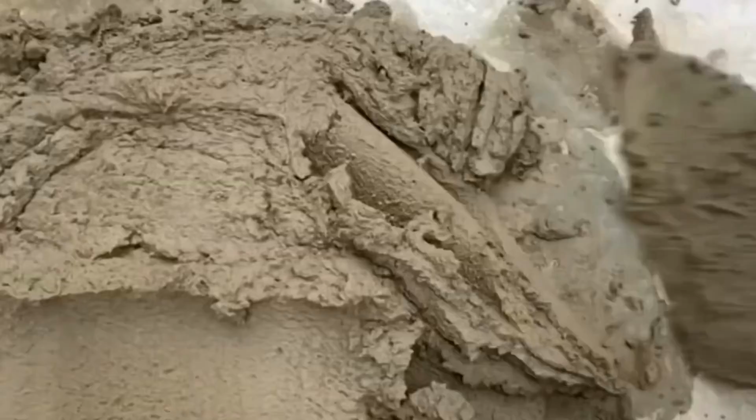We are on a big renovation project down in West London, Shepherd's Bush area. For those of you who know the area, we're working on a project here. So we have a 5-bedroom house. It's originally a typical 3-bedroom terraced house with a loft conversion which has an extra 2 bedrooms and an extra bathroom. So it's 2 bathrooms, 5 bedrooms, 2 living rooms and a kitchen.

We are going to be doing a full renovation of the house top to bottom. We are also going to be doing some structural work in this house because we're knocking some walls out. We're opening up the kitchen and dining, which I'll show you guys as well. We've got quite a bit of steel work involved as a result of that. We're putting a downstairs toilet under the stairs, and new bathroom, new kitchens and all that stuff.

New electrics, new plumbing all the way from the meter. We're putting in new water pipes, new plumbing, full electric rewire, new radiators, new flooring, new painting, the whole thing. We're doing the whole house. So I'm going to quickly show you guys a little bit of what's happened.

The guys last week came down and did some wallpaper stripping. There's wallpaper everywhere in this house. It's all lath and plaster walls. There's a lot of walls we're going to have to knock back. A lot of plastering, a lot of skimming. Obviously, you guys are fully qualified plasterers now. So yeah, let me just show you guys what we've done so far, and I'll explain what the plans are.

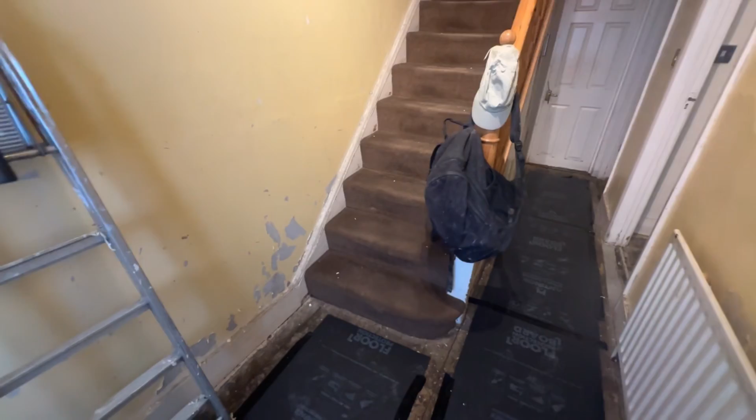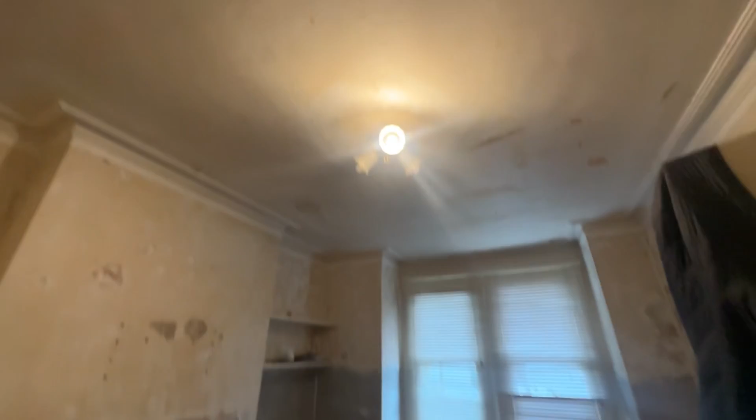Right, guys. So this is the entrance to the house. The guys are already taking wallpaper off here. You can see taking wallpaper off the ceiling, off all these walls everywhere, wallpaper all the way up. They've also done the front living room. Again, we're taking the wallpaper off, wallpaper on the ceiling, wallpaper on all the walls. Everywhere is wallpaper. You can see the state of it. The walls are in quite a bad state.

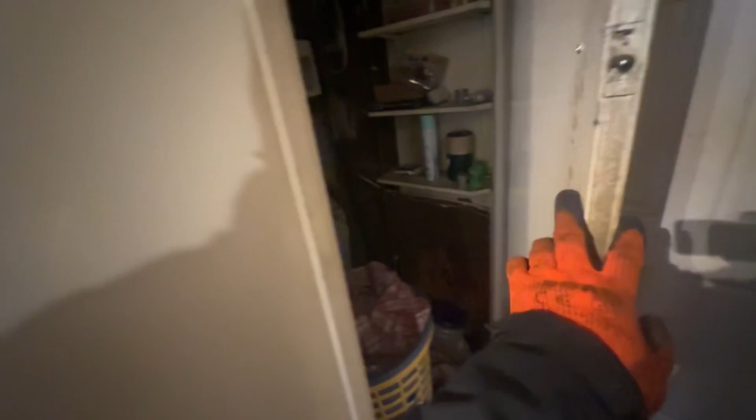This is under the stairs, so there's eventually going to be a toilet under here. Meters and stuff are all moving. There's a load of stuff like that to happen. There's a rear sort of dining area. You get some light. So we'll be in here soon as well. We've got to take all the wallpaper off the walls, off the ceiling. We're doing some new work here, so I think we're moving the door and putting a door in here to go outside.

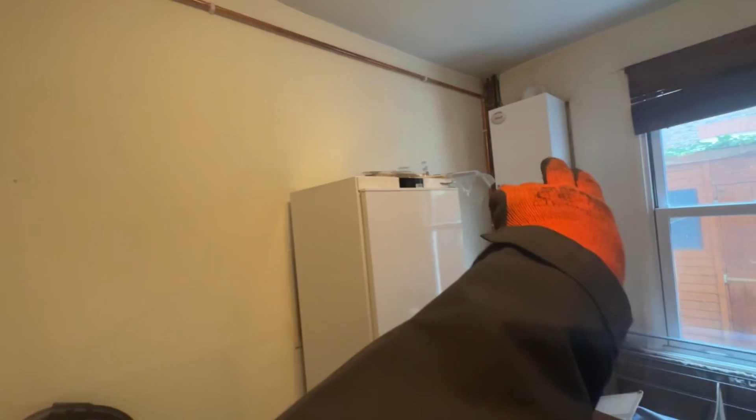The boiler's going to have to be moved as well, because we're taking this wall out. So we're taking this entire wall out here. We're taking this wall out here as well. And we're taking this wall off up to here. So the living room, the dining, the kitchen is all going to be open plan. So it's going to be quite a large, light space. So you'll be getting the dual aspect

daylight through the windows. And the kitchen side, which is over there, is a small kitchen. There's a door. We're going to put in a window there and put in the door here. So you'll be able to go out through this lounge to there. So I'll show you guys quickly upstairs a little bit, what you guys are doing now.

Ripping the first floor bathroom out. So the client is still in the house, actually. They're in the loft, so we're going to be working on this floor for now. The loft is fairly new, so it really just needs redecorating and a new bathroom. So we're going to tackle the loft later on in the build. We're in the bathroom now.

The guys have started ripping tiles off. You can see the state of this tiling. You see someone has had a go at the tiling here at some point. Plaster just coming off everywhere. We may do some modification here.

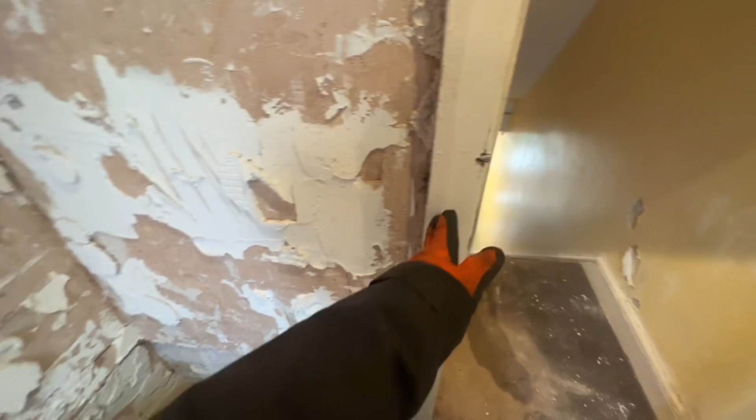The client wants a wider shower here, so we're going to see if possible we can move this frame over a little bit. Obviously the door's going to be slightly smaller. It is a large door, so we might be able to get a bit more space. I'm going to do the measurements today, see if they can get a larger 800 shower in this corner here, which is where they want the shower.

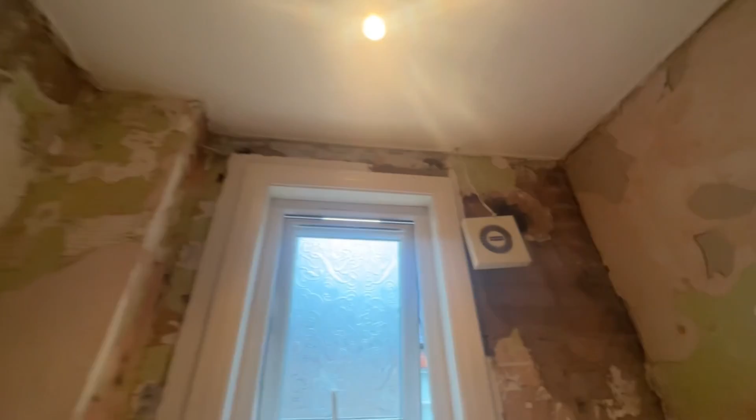Oh yeah, so we're just in here taking plaster off. You can see how bad this stuff is. Back to the brick, all coming off. So a lot of plaster to hack off, a lot of bonding and stuff like that, hardwall and skimming, plasterboard and all that stuff.

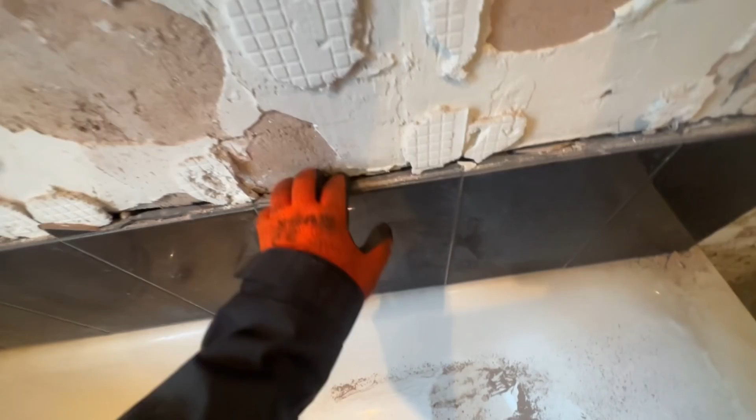Yeah, there's some timber. Somebody's screwed timber, and probably the plasterboard was damaged from water ingress and someone's patched it with plywood. So we've got to break all that out as well. Right, so let's see the other rooms that have been worked on.

So there's this room here, which the guys have already taken all the plaster off. You can see here in some places how bad it is. It's going right back to the brick. So yeah, there's going to be a lot of plastering work to do in this house.

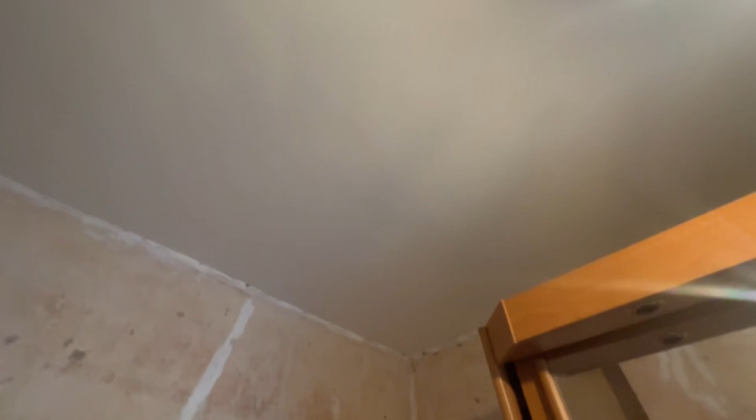The ceiling has been replaced. When they were doing the loft, we were told there was some damage to the ceiling. So this is a brand new ceiling. So we didn't have to take any wallpaper off this ceiling, and it's really nice and flat. So it will stay like this. It's just the walls we're going to have to plaster in here. Obviously we need to get the floorboards up so we can put new electrics and new plumbing and all radiators and all that stuff.

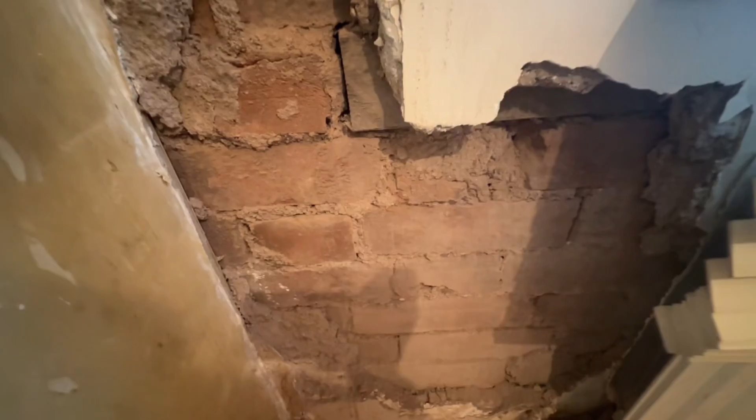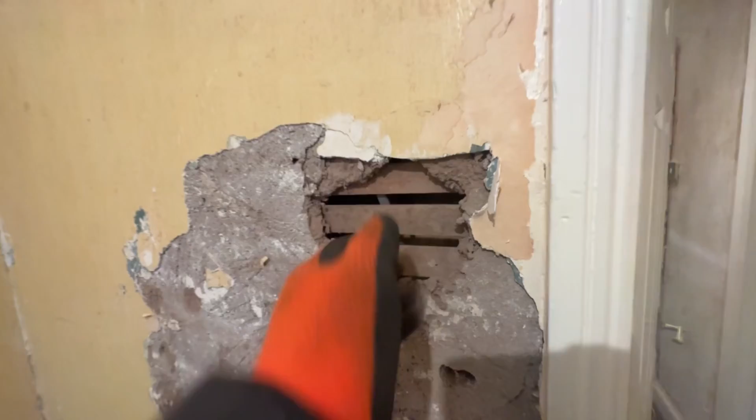Then we have this smaller box room again. Again, you can see around the windows lots of damage; we had water ingress, the plaster's just come off right back to the brick. All around here, all these skirting boards are going to get ripped out. You can see here is the old lath plaster, and some of this stuff is really bad. It's just crumbling off. So a lot of this stuff is going to have to be replaced. Again, all the ceilings, cracks everywhere. So it all needs to be addressed. This room at the moment is packed with stuff, so we can't go in there.

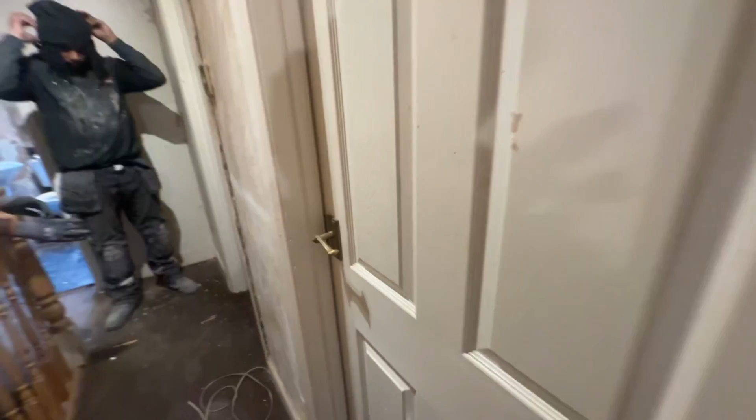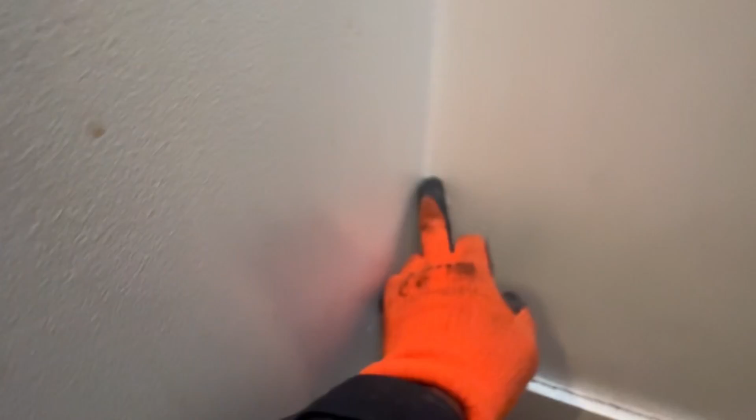Just quickly show you guys a little bit of upstairs. So we've got a loft, which is fairly new. So at least everything is in good condition up here. It will be minor decorating, like filling. I mean, some filling here. You see things like that, screws that have burst off the wall. Filling, caulking, that sort of stuff. Easy stuff for the boys to do.

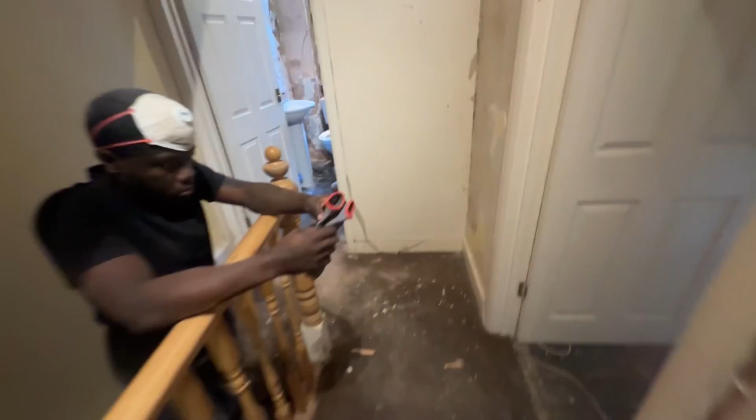As you can see, some cracking on the ceiling here. Got a skylight. So we have one bedroom here, we have one bedroom here, which are being used. And then we have a bathroom in here, which is also getting ripped out and being all replaced. So that is pretty much the state of things. So today we are working on clearing the bathroom out, getting it ready so we can do some plaster work in there, sort of square everything up.

So today we're in here, and then also I've got to do a load of measurements today for all the steel work. Let me show you guys roughly, and explain roughly what we're doing with the steel work. So roughly around here, we're going to have a steel vertical column, which will obviously be boxed in. So we need to get under the ground. We've got to put foundations down there. We'll have a steel beam coming up here. Basically, this wall here, or the foundations of this wall, are not strong enough to support all the steel work that's going on.

So we'll have the column up here, and then we will have a steel sitting on it, running on top of it or bolted to it, running all the way along this wall here, all the way to that wall here. And on the other side where the window is going to be, there's going to be steel running across almost like a lintel basically, and that steel will be sitting on top of it and bolted to it. So that's that end of it.

So then this whole wall will be able to come out, and also off the steel that's running this way, there'll be another steel bolted to it here above this wall, and it'll be running across into the party wall of the neighbors. So we have a party wall agreement there. So it will run across to there, and when that runs across, this lath and plaster wall can come out.

So then, as I said, this whole thing is going to be opened out from this side all the way across to here and all the way out to this kitchen. So you'll be able to see essentially the kitchen from the front door. This whole space you'll be able to see. So it'll be very much open and quite bright.

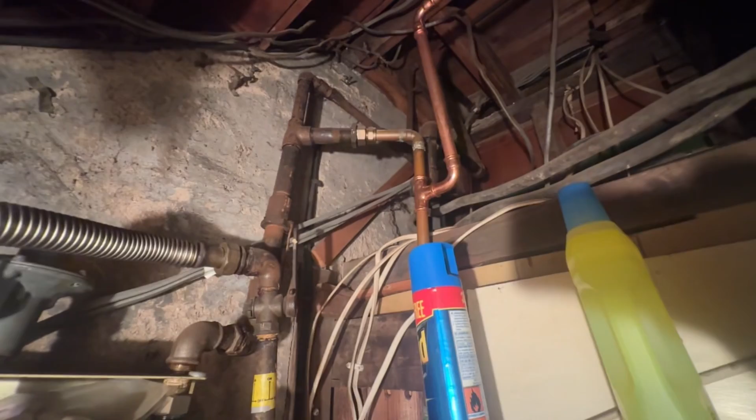So we can see our gas pipe in here, or just about. I'm not sure if we've got any light in here. Yes, we do. So we've got our gas pipes. There's loads of stuff. You can see at some point some work has been done on the gas pipe, and they've put in a new pipe and they've surface mounted it, and obviously it's going on top of the wall that we're going to be knocking out. It's running across here, it's running down to the boiler, and they put a new boiler in.

So that pipe is going to have to end up being rerouted, probably buried in the ceiling or under the floor to the new position. I think the boiler is probably going to go over there now in a kitchen cabinet.

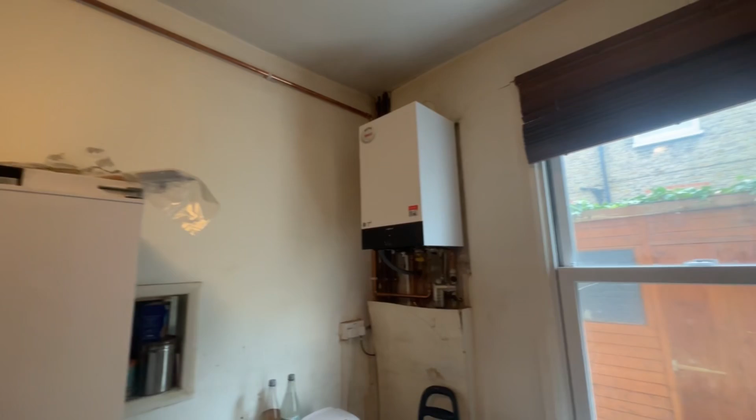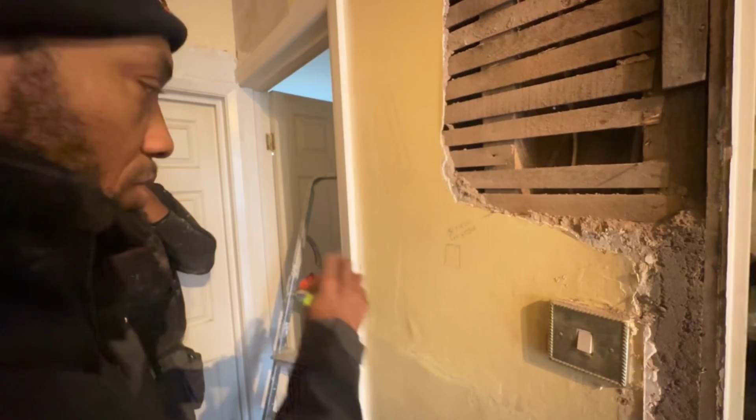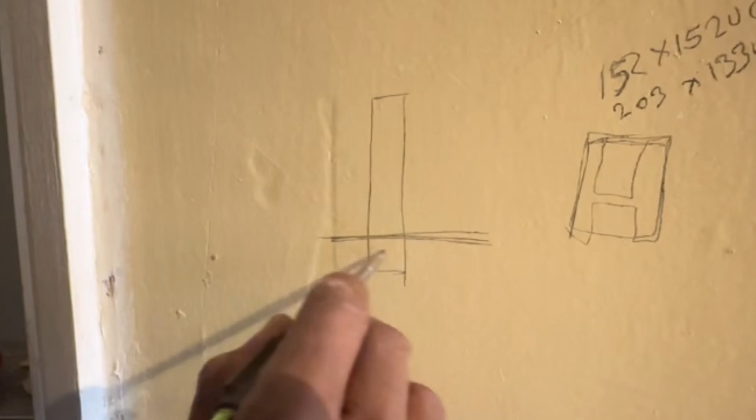Right, I'm just going to explain a little bit of the steel work detail. Actually, what I'm going to do is sketch it out quickly here, so as I'm doing it, I can explain from this drawing. So we're going to have a column here, which is going to go down underneath the floor here, and it's going to be on a foundation. Okay.

It comes out of the floor, up the wall. Then on top of it, we're gonna have a steel running this way, which is gonna basically run along that way. And on that end, where there's gonna be a window, there'll be a steel beam on top of the window. And this steel will be sitting on the end of that steel here.

Now going that way to the neighbor's side, we're gonna have another steel connected off it somewhere around here, like this. And that end of the steel, 100 mil of it, is gonna sit in the party wall. Right, so I'm here today. I have the detail of all these different connections. There's connection here, there's connection here, and there's connection here.

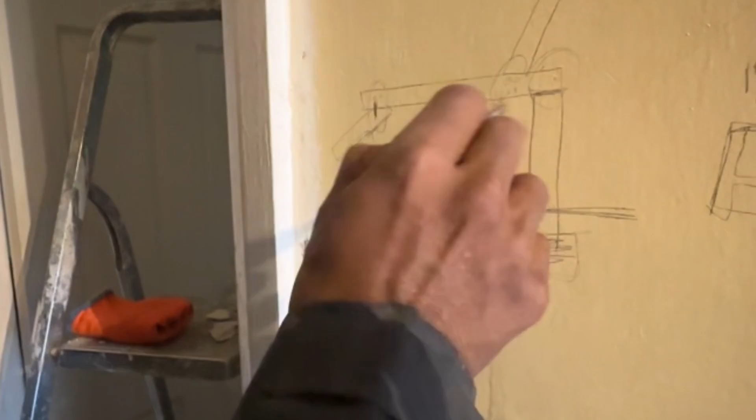I need to get the measurements of the actual lengths of the steel and exactly where, for instance, this connection is, so that the steel manufacturers can make the bolts in the right place. Same thing for here. They can drill the holes and so on, make the plates, weld the plates.

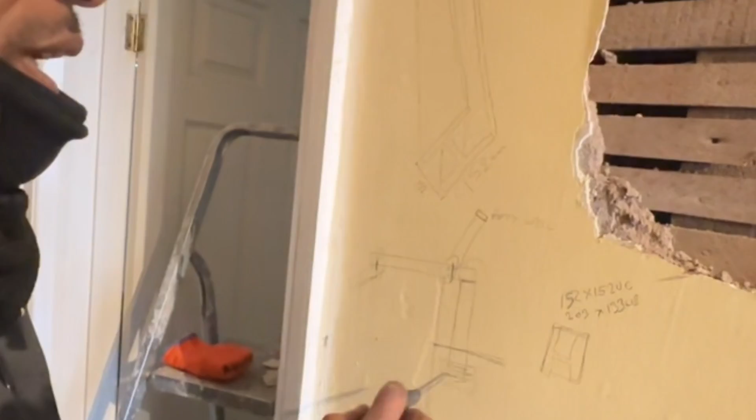So here, there's going to be basically a column that's going to go tight up to this timber frame here. This timber frame is supporting the door jamb, and we're gonna put the steel right up to it so we can actually screw this timber straight into the side of that steel. So the steel that's going here is going to be a 152 by 152 UC. That typically means 152 millimeters in width and 152 in depth.

So the steel, if you look from above, is sort of shaped like this. You've probably seen it. Some people call them an I-beam, shaped like an I when you look from above or from the end of it. And it's going to be 152 mil here wide, and it's also going to be 152 that way. So it's essentially square. All right.

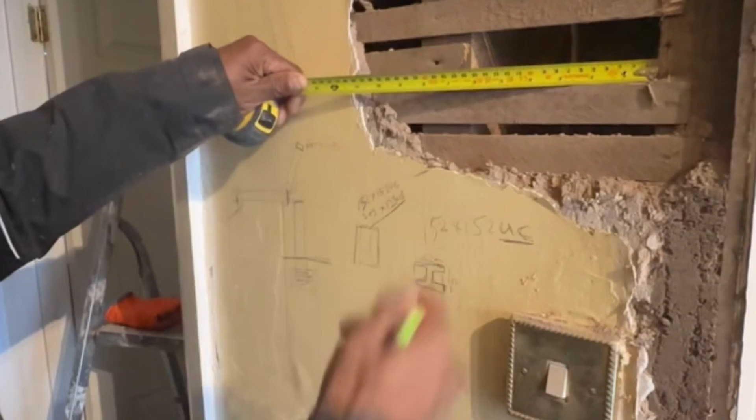The UC stands for universal column, and the other steel here is going to be a UB, which is universal beam. So if we imagine we're going to have from here to here 152 millimeters, so that's 15.2 centimeters, maybe roughly here. We're literally going to sit in between these two. This onward is all going to go. The only piece that's staying is that one. So we'll have our steel sitting straight down here into the ground, straight up.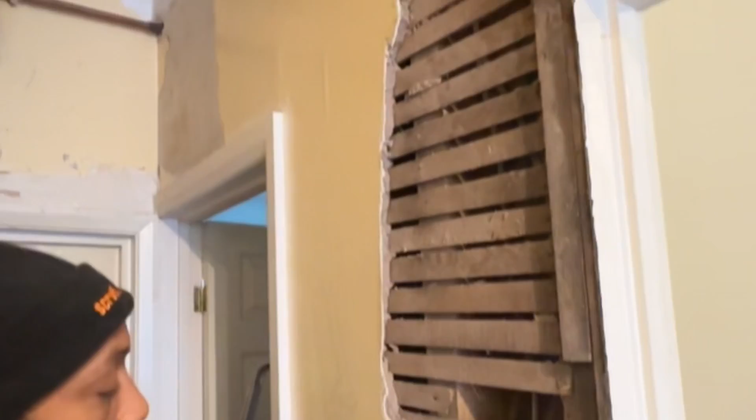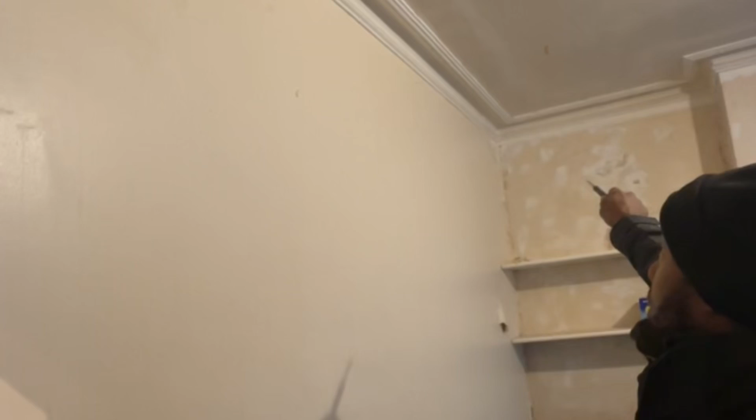So what we need to do is find out where the bottom of the steel is going to be under the ground and measure from the bottom of the steel up to where the top of the steel is going to be. Okay. I'll usually work downwards. So for instance, this steel here that's running to support the joist upstairs, we will find out where the top of the steel is, where it's going to be sitting on the joist. Again, I'll show you here.

So there's going to be a steel running along here. This is the party wall. It's typically going to be 100 mil sitting inside the wall, so we have to make sure we include that measurement when we're measuring it. So we'll measure from the wall and then we add the 100 mil or whatever. Obviously, you have to allow for the plaster. These walls are quite thick, so you've got to add the plaster length as well.

And then where it sits on top of this steel, there's going to be some sort of welded plate on there, and it's going to be bolted down like this into that. So this is the 203 by, what's the size on that? 203 by 133. Yeah. So 203 in this case is going to be the height, 203 millimeters in height. And then the depth of it, if I can do it in 3D, or the width of it, is going to be 133.

Yo, architect one. What are you saying? We're good?

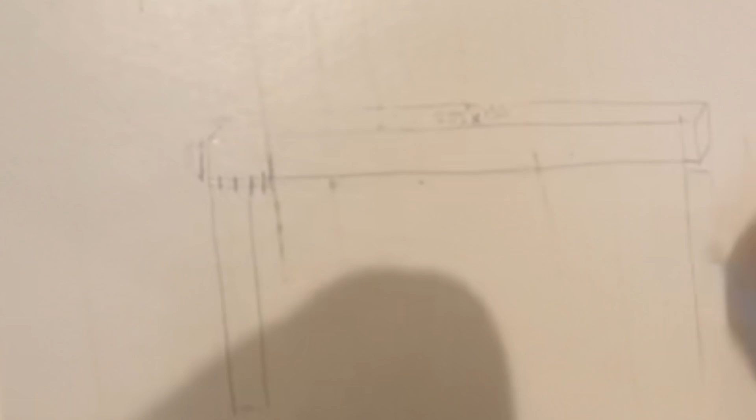Right, so that's going to be the size. So again, it's going to be the same sort of, let me try and do the 3D again. It's going to have the same webbing in it like the other one. Yeah, so it has this little bit of webbing in, so there's indentation here.

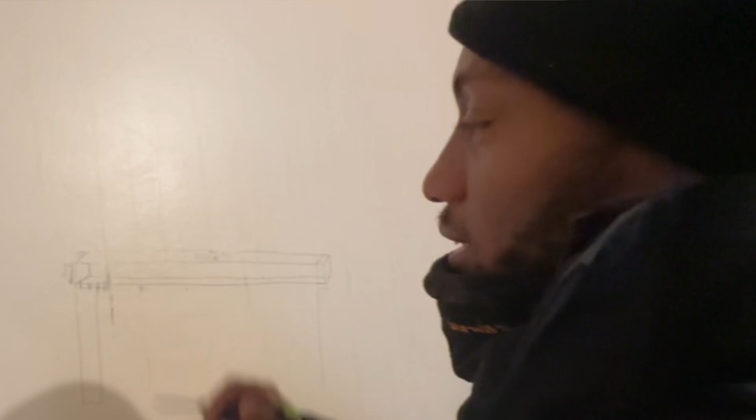This guy laughing at my work.

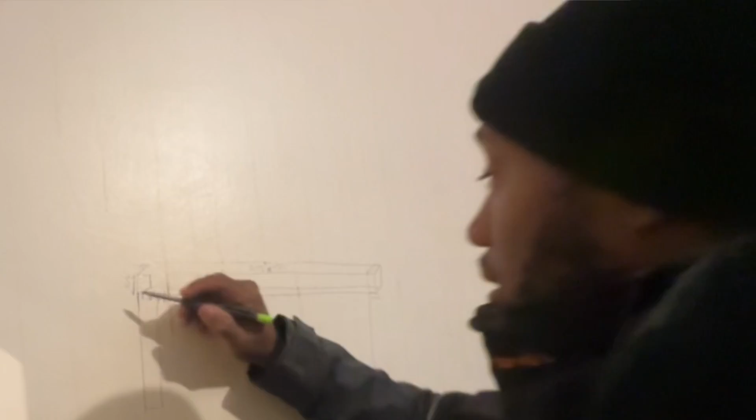Right, so what we will do now is measure. We can measure this beam quite easily because we know where the end of the steel is going to be here, and we know where the end of it's going to be there. All right, something like that. I'm actually doing this wrong, actually.

No, I'm not doing it wrong.

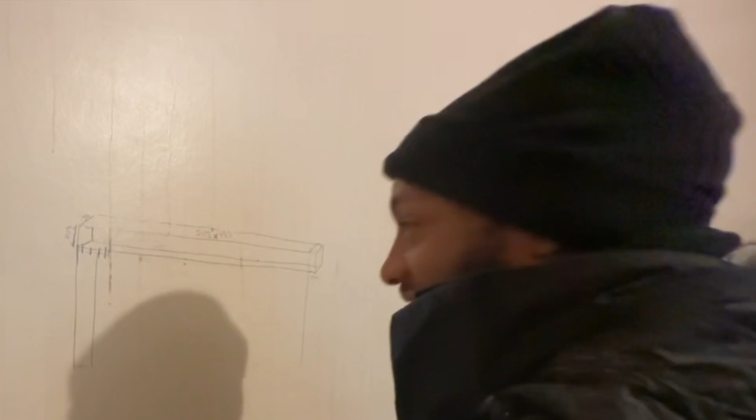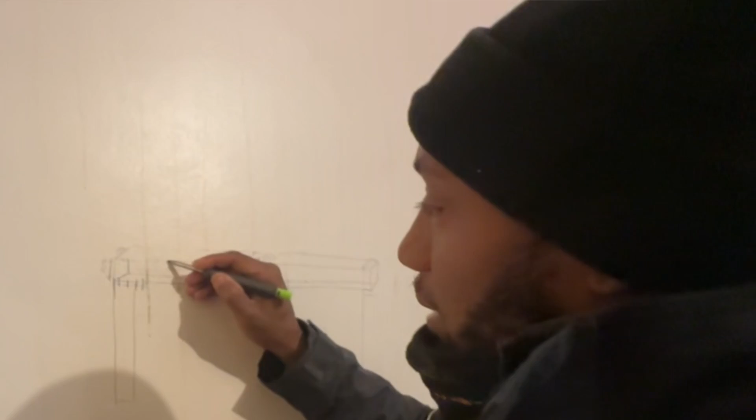I'm only joking. No, what it is, this beam, sorry guys, is the one that's running that way. We're gonna have another beam running off it somewhere around here, somewhere around sort of here like this, which is gonna be this one. So we can measure from here, which I'll show you guys, which is basically from here all the way down to that end, and that will be the length of this one.

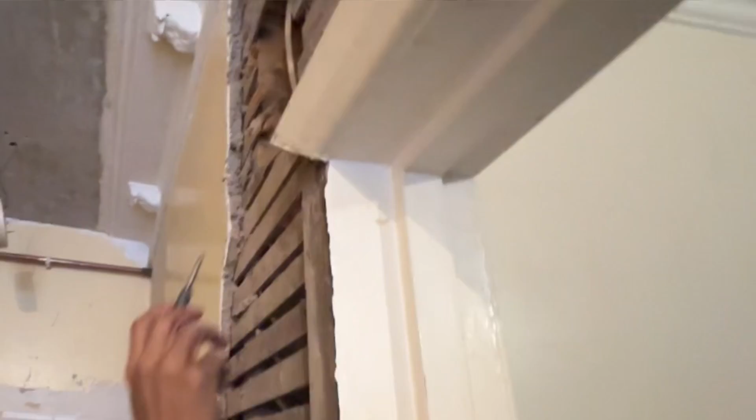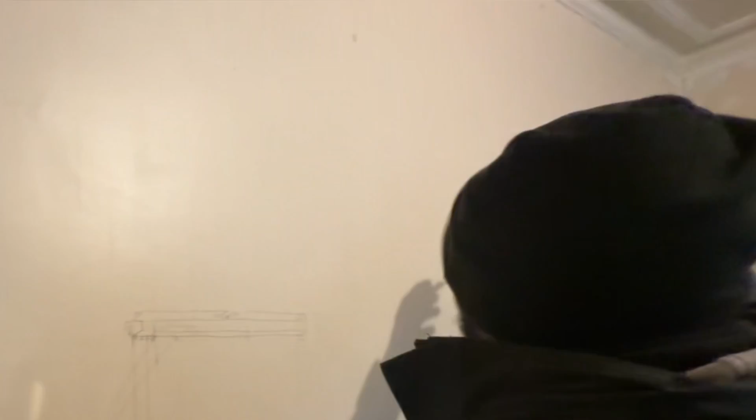Then we've got to figure out where the one that runs to the neighbors goes, which is basically exactly on top of the middle of this wall, and then we'll measure it from the side of the steel all the way into the wall here. So that will be it there, running from the bolting in here. It bolts to the side of the steel, a couple of bolts, and then it will go in the wall here.

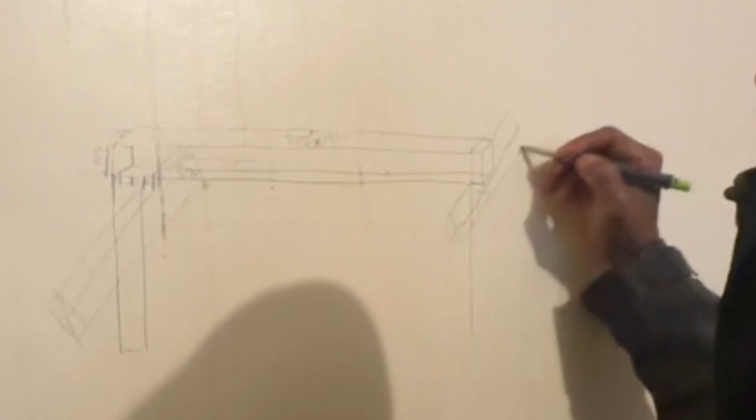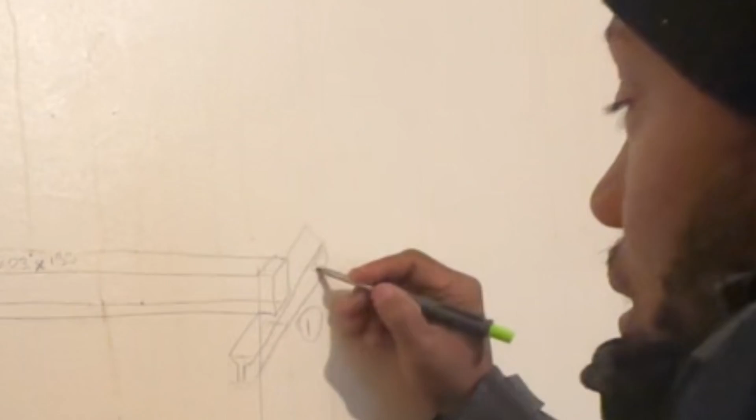So there's that. And then the last steel we're going to do is down the kitchen end, the one above the window, this one's going to be sitting on it like this. Yeah, so that's the last one. So in terms of how we install them, this is probably the first one we will install, the one above the window, which can go in at any time really. Even though we haven't got the window, we can get that steel in.

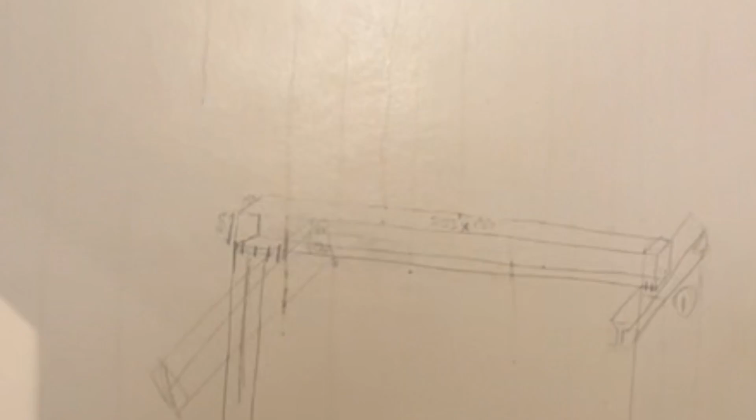Then the next one will probably be this column here. Then obviously we'll bolt this one on top of it and sit it on top of this one, and it also bolts onto this one. And then lastly, there will be the one coming off this one, which will be there, and it will go inside the wall. Obviously we've got pad stones to fit as well. So we've got a pad stone to fit in there, which we can again put in ahead of time, take out what brickwork we need to do, put the pad stone in.

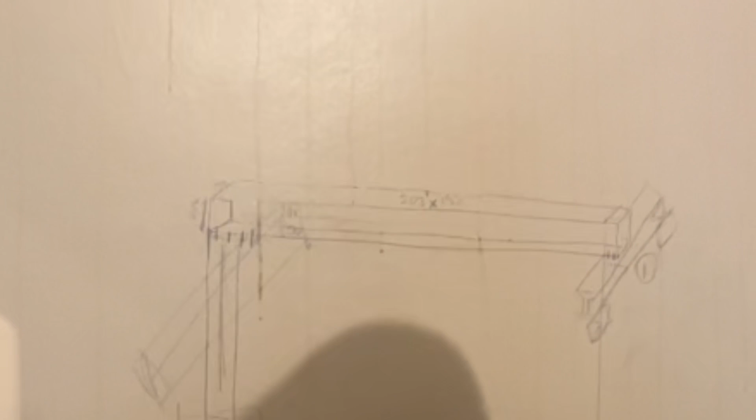And obviously we need to sort out the foundation of the column as well. And then we've got pad stones for the window steel either side. We're gonna put those pad stones in. So we basically got 1, 2, 3 pad stones to put in, and I believe we've got a concrete pad stone to go down under the ground. I'm gonna look at the drawing again, but I think that's the case.

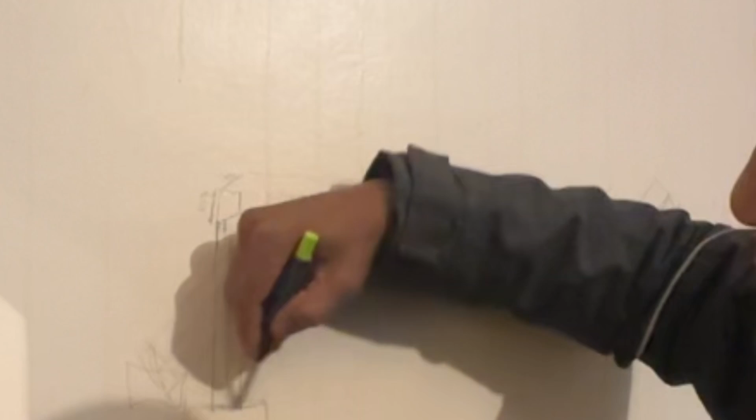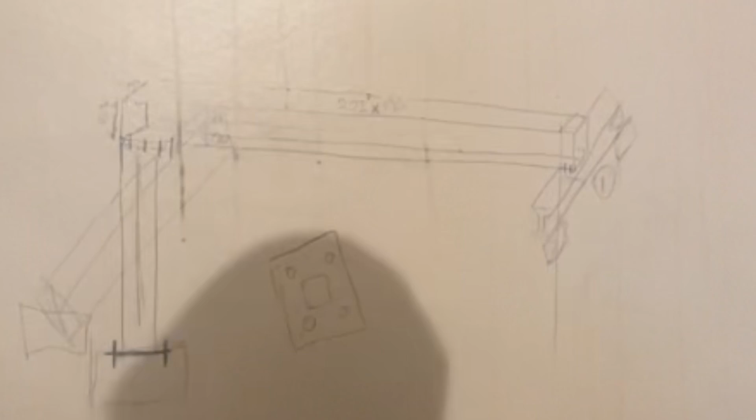The bottom of this steel will also have a plate on it, and it will be anchored down into that steel, probably with 4 bolts in it like this, and you'll have the steel column in the middle coming up like that. So that is pretty much the steel detail. So this is a big part of this job. Once we get this part of the job done, then walls can come down, this wall can come down, all that side wall can come down, and we can open up the entire space.

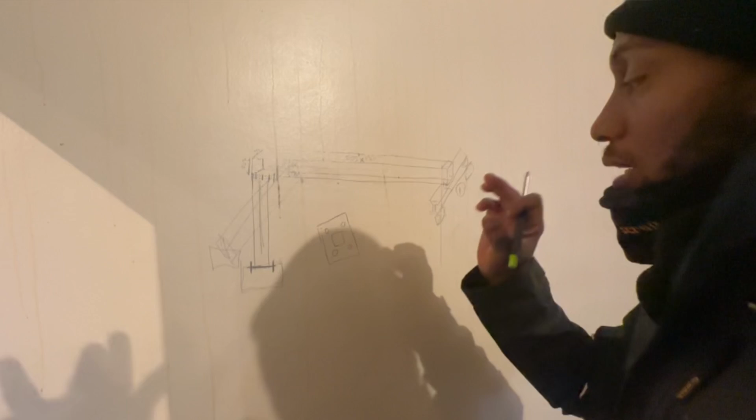So today's job for me, what I'll be doing is getting all these measurements, double checking them, triple checking them, and then when I'm happy with it, I can send these off with the connection detail drawings to the manufacturer and get the process of manufacturing underway.

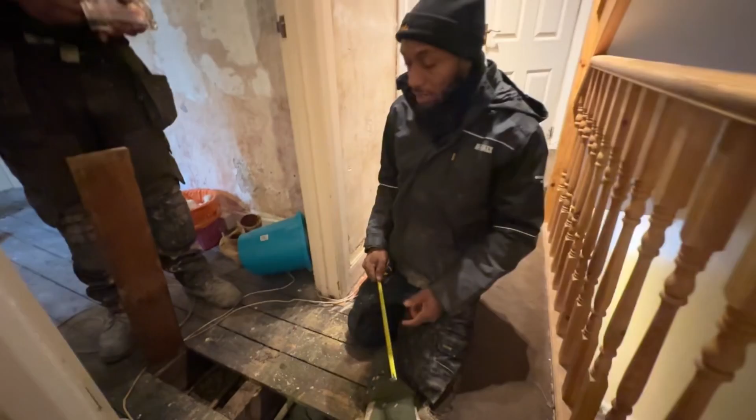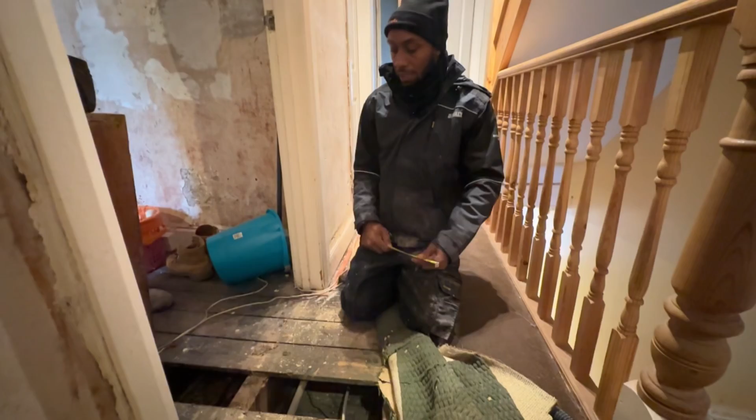All right guys, so we are still just doing all our measurements and double checking. We've pretty much measured all the steels, and we've got our sizings. We've marked out where the steels are going to have their sections and drilling and stuff like that. The last one we do now is the column. So to determine the length or the height of the column, we need to work out the bottom of the horizontal steels. So the bottom of the horizontal steels is pretty much determined by how high up into the ceiling

we can get them. Now, in an ideal world, you'd have them go into the ceiling and bury them. In a lot of these older houses like this, the joists are just undersized. So the steels end up being a lot higher than the joists are. So for instance, our steel beam is 203 millimeters, okay? Which is 20 centimeters, right? That's going to be the height of our steel, which is about 8 inches.

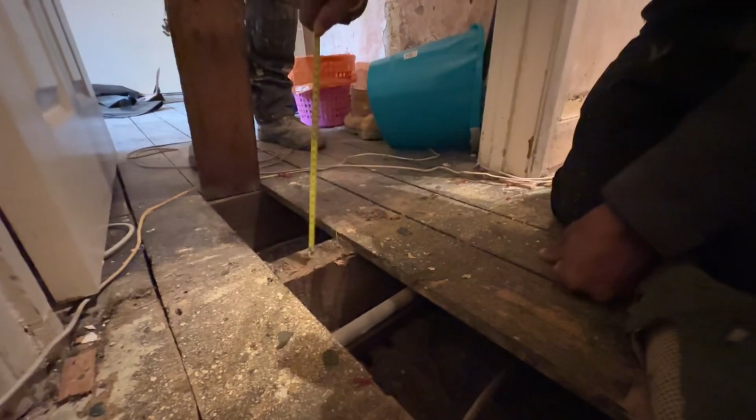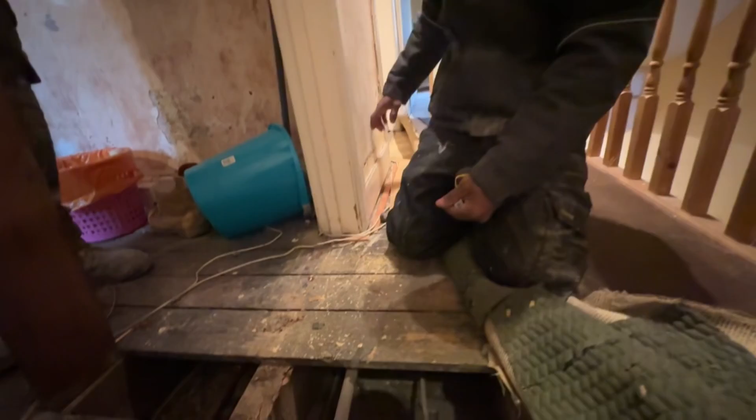This is the joist here, which is where our steel beam is going to be. So as I said, in an ideal world, you would have this joist removed, and you would have your steel running. This is upstairs, by the way. It would be running under all this wall here, and all the way under this wall that goes to the bathroom, and it would be tight up underneath here, buried inside this ceiling void. Now, for that steel to be able to fit in the ceiling void, we would need to have that 20 centimeters to get it in there.

We have 18 centimeters, right? So this joist is not big enough to bury the steel inside the ceiling. So the steel has to go below the ceiling and be boxed in, which is what 99% of houses in the UK will be like, especially older houses, because the old beams are just all 7 inches sort of.

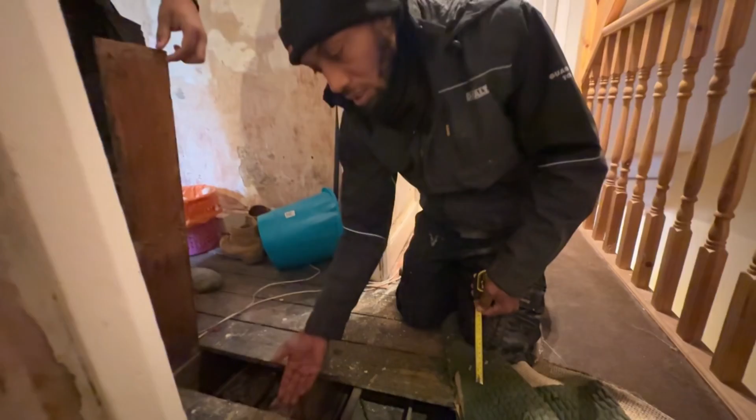So what we're gonna have to do now is we'll break the ceiling from below, take out some of that lath and plaster right underneath this joist, and then we'll measure from the bottom of this joist downwards, and that's where our steel will be. Our steel will be tightly fitted under this, and then it will obviously be supporting this upper wall.

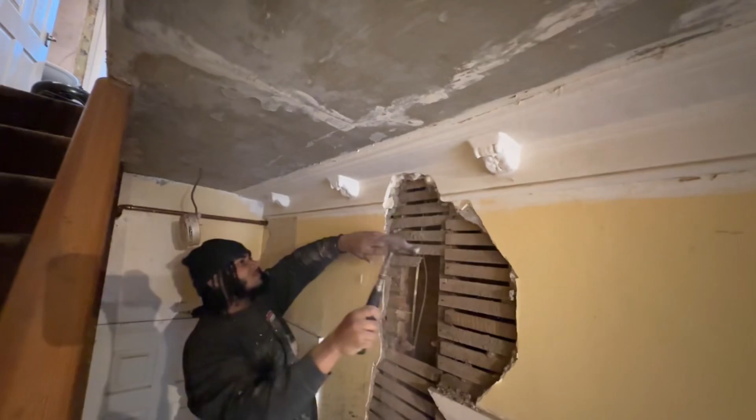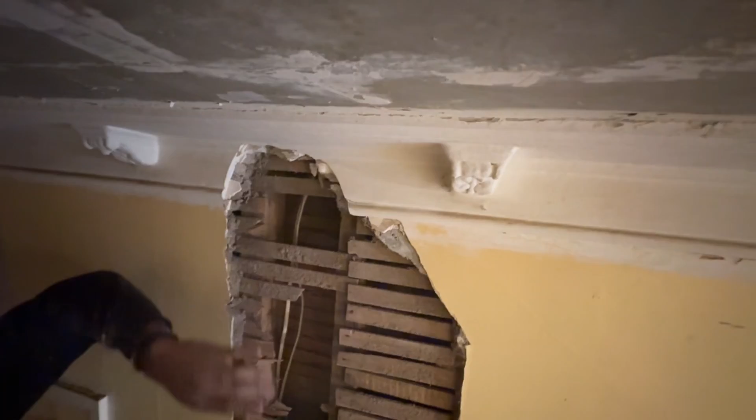So that's what we're gonna do now. We're gonna have a look at that. It's the last measurement we gotta do. Then we work down to the ground. Yeah, you can just see them. Break some higher up. See. So just break some more of the coving on the ceiling part. Yeah. High up, the ceiling. Yeah, a bit there.

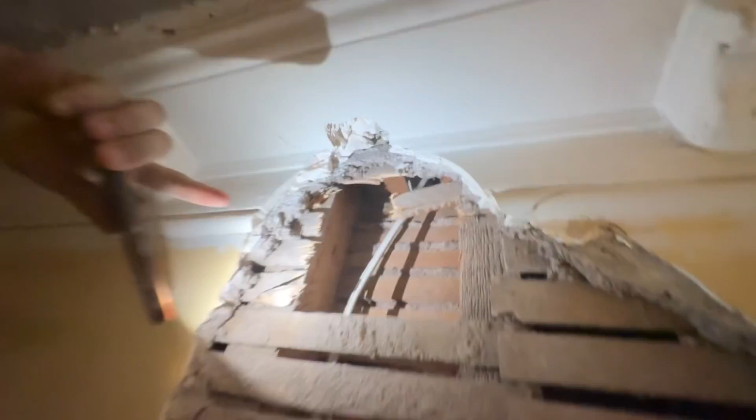See the joist there? Yeah, it's right there. It's that one there, isn't it? Oh, we can see the floorboards. Oh, is that floorboard? That's the joist. Oh yeah, right there. Okay, see it. So there is our joist, and you can see the lath that's nailed to it. That's the joist, that beam in the middle there. And that's where our steel beam is going to be tight underneath there.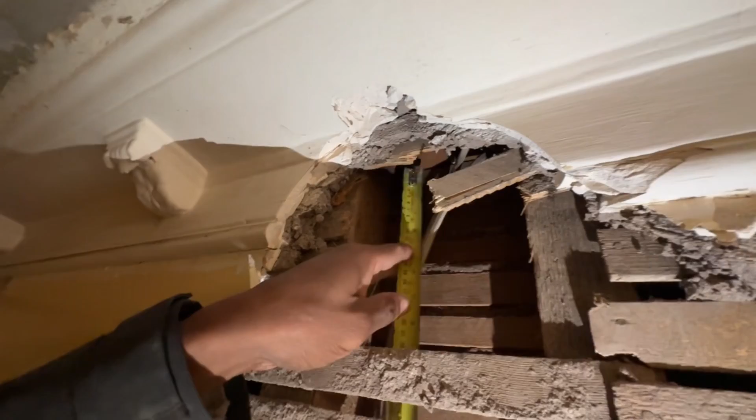So we're going to measure down from there, 203 millimeters. And then we can get to where the bottom of our steel will be. Okay. I'm actually going to measure it from these little laths here, the little spaces essentially. So what we do is measure from here. And we have around here. Okay. Bottom of our steel's going to be here. Alright. So we know the bottom of the steel is going to be here. We'll have to allow for the plate that's going to be welded on top of the column, and then we work down to our column.

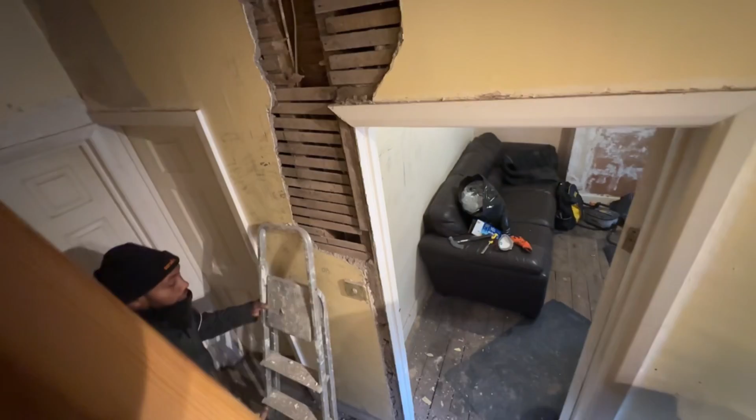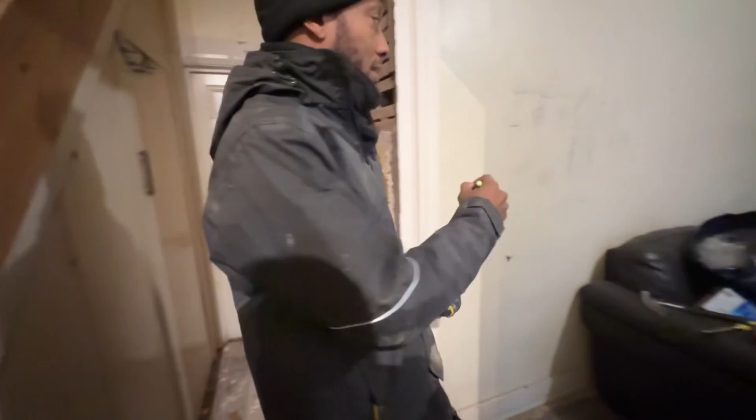So next to do is to take some floorboards up here and have a look down. So we have to create a foundation pad for the steel column to go on. I'll show you guys here. It's going to be something like this. It's going to be a concrete pad, 1 meter deep, 1 meter wide, 1 meter wide that way. And then we will anchor these 6 bolts into the concrete, and then this will be the base plate of the steel column that will slot over that and be bolted up with 6 bolts, and the column will be rising off that, down there in the ground.

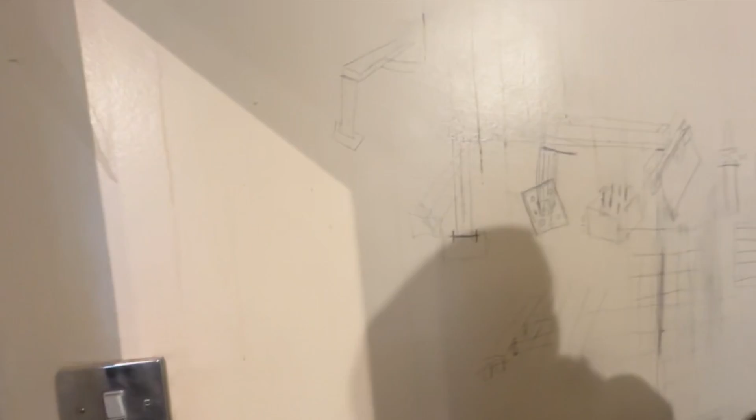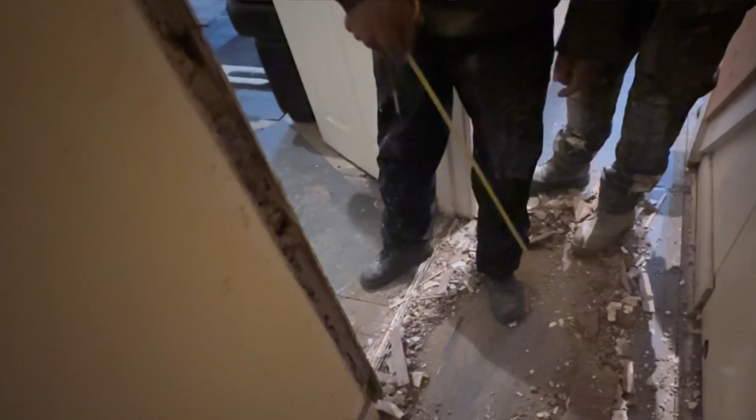So we're gonna have to take some floorboards up, have a look underneath the ground, figure out how we're gonna do it. It's gonna be very difficult. We've done it before, but we're basically gonna have to remove a section of floorboards. We're gonna have to get down there and dig that column out. And obviously there's going to be some sort of foundations under this, well, there might not be actually, but we got to figure out how we're going to dig this in, support everything, and pour the concrete. So this is the challenge on this bit.

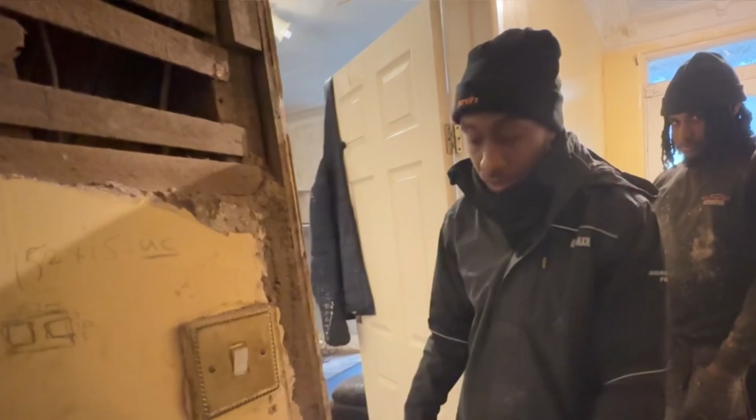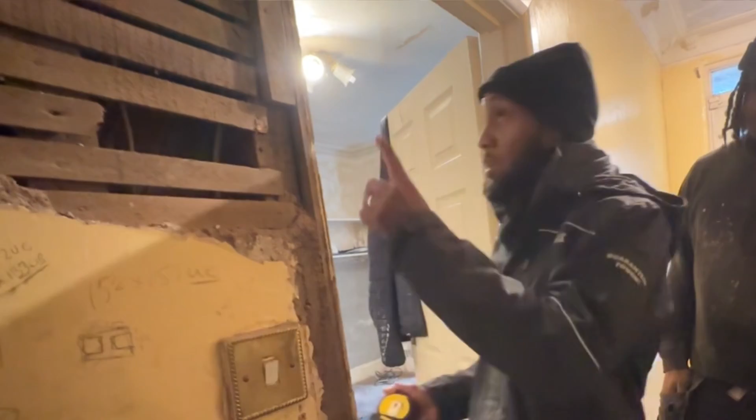Once you get past this, that's the difficult part as far as the structural work is concerned, and hopefully we get all our calculations right, put the 2 pad stones in, then the steel should be going in fairly easy. The steels are not that heavy. The heaviest steel, the longest one, we have one running that way, which is about 135 kilograms. So they're not actually that heavy. So it shouldn't be too difficult for us to get in.

Hi guys, so that is the end of it for today. It's already getting dark. It's 5 o'clock. We are out of here. So we've done a lot of our calculations. We actually got the external window and door calculated, the sizes, giving that to the client so they can get that on order. So tomorrow we'll be back on it. We got to do the calculation for the steel column that goes down. We'll do that tomorrow as well. Take the floorboards up, measure down below. And actually we're going to start digging that hole.

Tomorrow's job is to get under the ground, underneath the house. Will be fun, and try and dig that huge pad that we need to dig down there, so we can get that inspected by the inspector once we do dig it, and then get that passed, and then we can start pouring concrete in preparation for the steel.